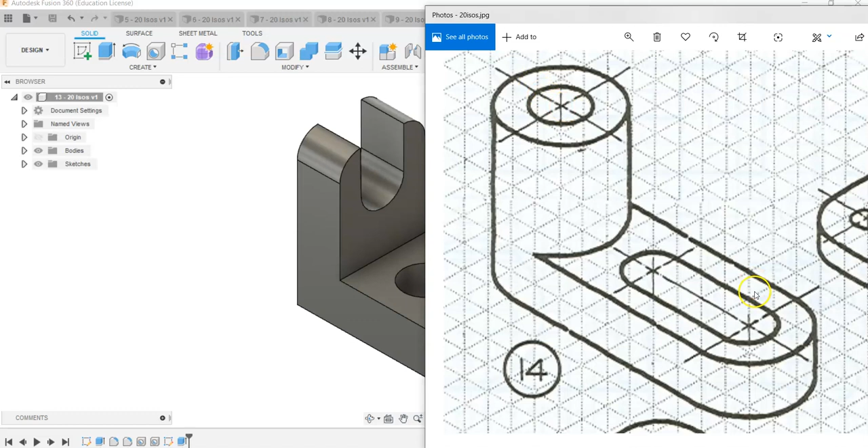So we have to find what the width of this object is first. The width of the object is 12. But we'll notice that we have a radius of 2 on each side. So if we have 2 here and 2 on the opposite side, I want to draw myself a line that's a distance of 8.

Let's go ahead and create a new design, click on our plane, and draw a line that's a distance of 8. This might make things a little easier to understand as we go, because the 8 dimension is what we'll call the spine of the object.

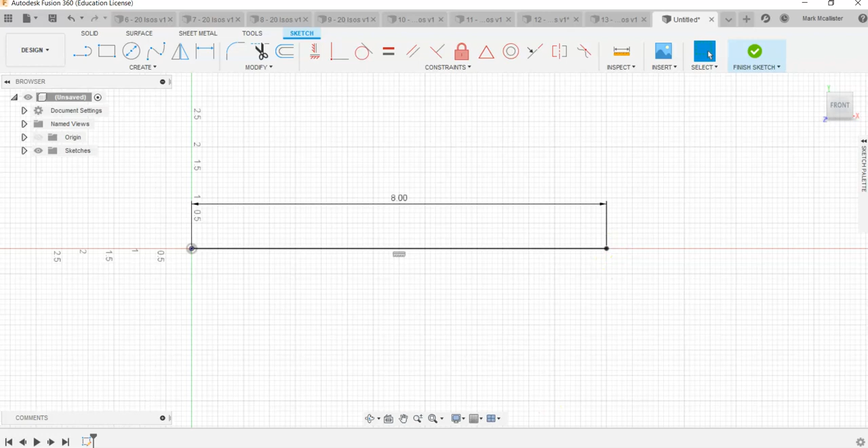It's the center point of our arc out here, and the center point of our circle here is this point. This can make things easier when we go in to draw our circles. Our circles have a diameter of 4, so I'm going to say 4 in this case and hit enter, because if we look back here, we have 1, 2, 3, 4. Same thing up here on the top.

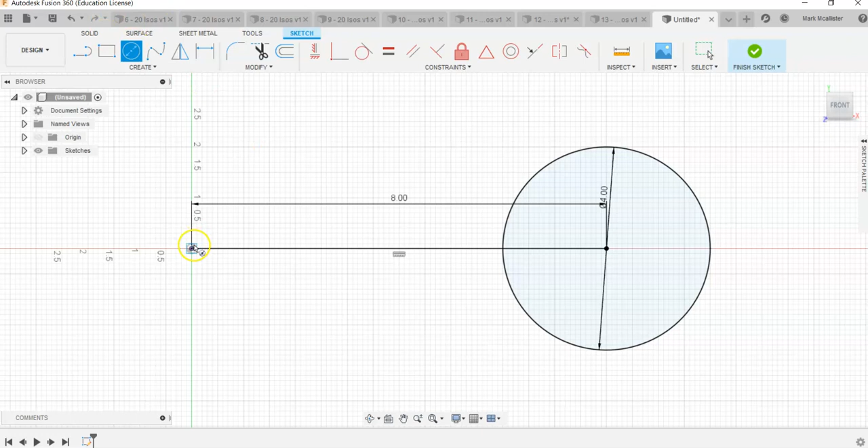We're going to go to the line circle command, put in a distance of 4, and hit enter. We're going to draw a line from up here at the top, and we want to make sure these lines are tangent. So when I click here, I'm going to drag over and click when it becomes tangent.

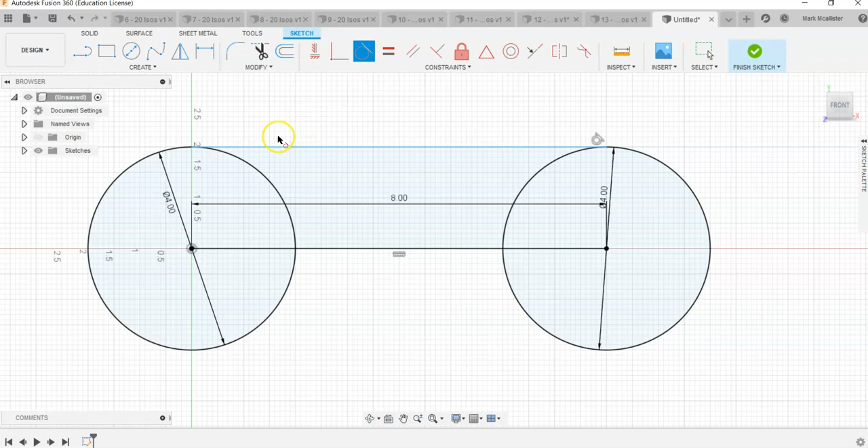We see that circle with the line on top of it, we're going to click. Now we want to make sure that the first line was tangent, so we're going to grab the tangent command, click here and click on our line, and make sure this dot comes up.

Now we want to mirror this to the opposite side, because this is a symmetrical shape. So I'm going to go to the mirror command, click on the top line, and it's going to ask for what mirror line we want. I'm going to click on our line here in the middle and say OK, and it flips to the opposite side.

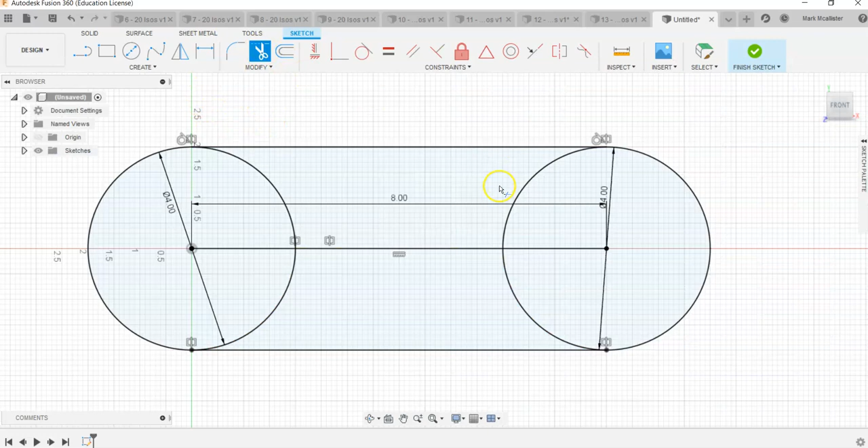Now we can trim out the objects in the middle, although we don't want to do that over here on this side. We only want to do it on the right side, because we want to be able to extrude that part up if possible. So we're going to trim out the arc on the opposite side. We'll go to trim, click on these two arcs on the inside, and we want that part out.

Now we're going to create the slot that we see over here on the side next. We want a center to center slot. So from here is 4, the distance from center to center, and 2 is the distance. We're going to go up to create, and we're going to choose slot, center to center slot, and click right here.

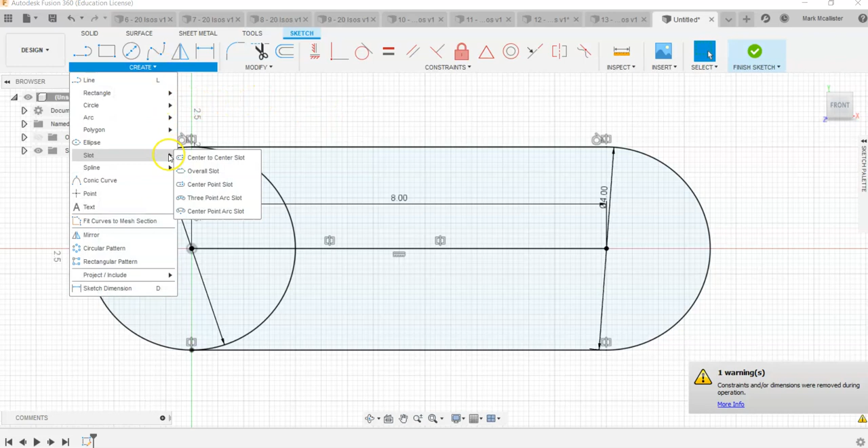We're going to drag to the left and put in 4, hit enter, then drag out, noticing our 2 arrows showing the distance. We'll put in a distance of 2 and hit enter, and we have that distance right there showing the side from one side of the slot to the other.

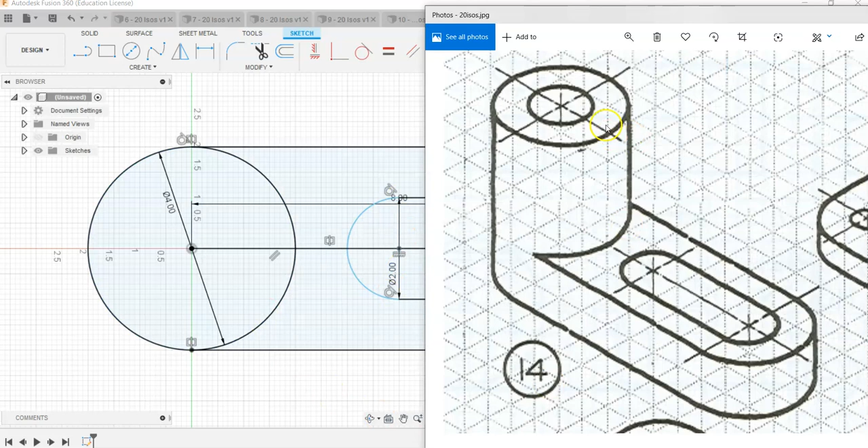We also want to draw for ourselves a circle that has a diameter of 2. Circle command here, diameter of 2, enter, finish sketch, go to extrude.

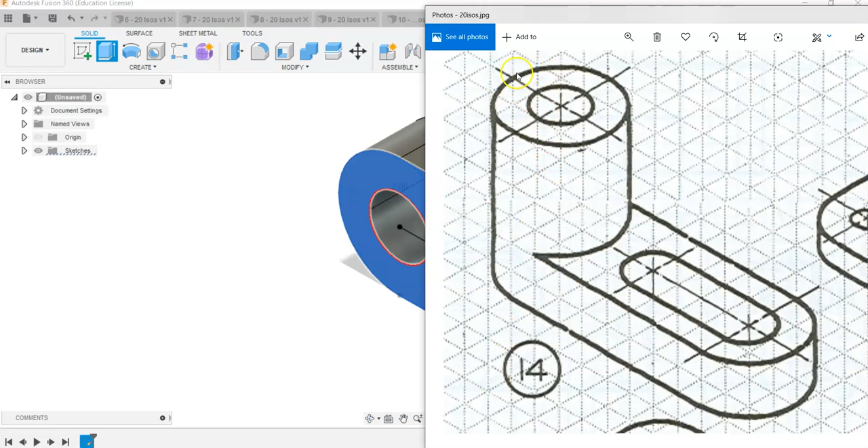We're going to go ahead and extrude only this part back. This should make things relatively simple for us, because then all we'd have to do is draw ourselves this circle and extrude it up. So all we need here is a depth of negative 2, and say OK.

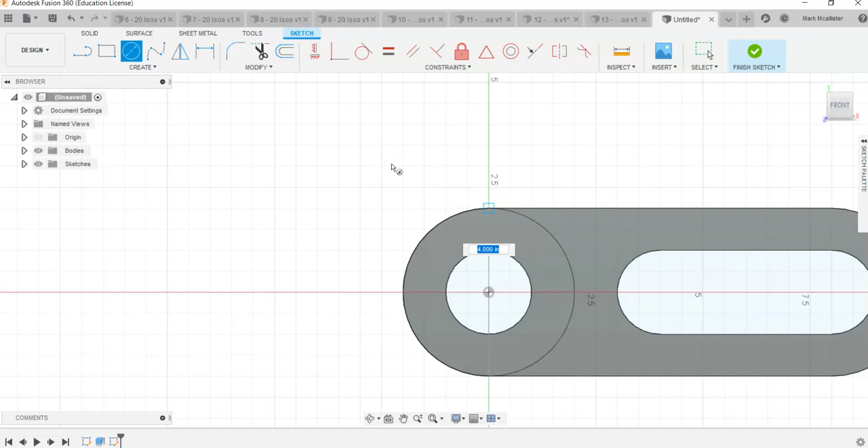So with this object, we already have our hole, and we have our slot drawn. If we grab Create Sketch and click on this surface here, drawing ourselves a circle from this center point out to the edge should be pretty easy. Just say Finish Sketch, come back around.

We'll take a look at our extrusion distance, which is going to be up a distance of 4. Extrude just this part, a distance of 4, enter, and we can go ahead and change up our view cube for purposes of later.

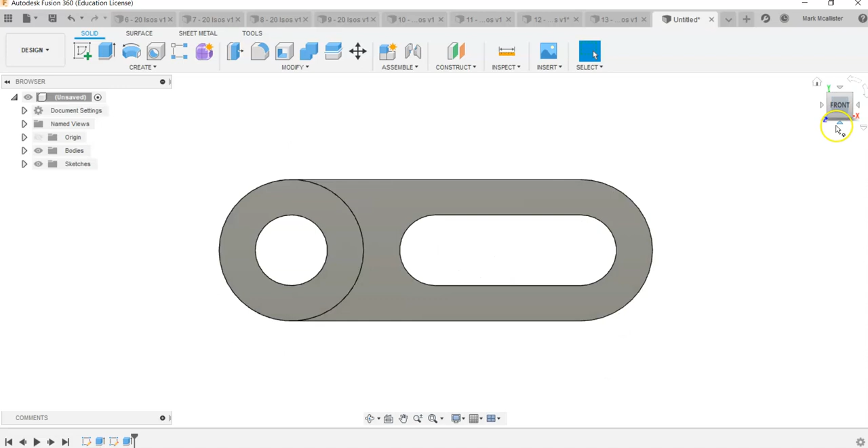So what we're going to do is move our view cube around until we have this corner. We can right click on that corner and go to Set Current View as Home, and go to Fit to View. Click on the word bottom, right click, and go to Set Current View As, and go to Front. Click on the house button, and we automatically now have an isometric view that looks exactly like the isometric view in our sketch.

Again, this is very important for when you go in and start placing views on a drawing sheet, which you will do towards the end of this project.

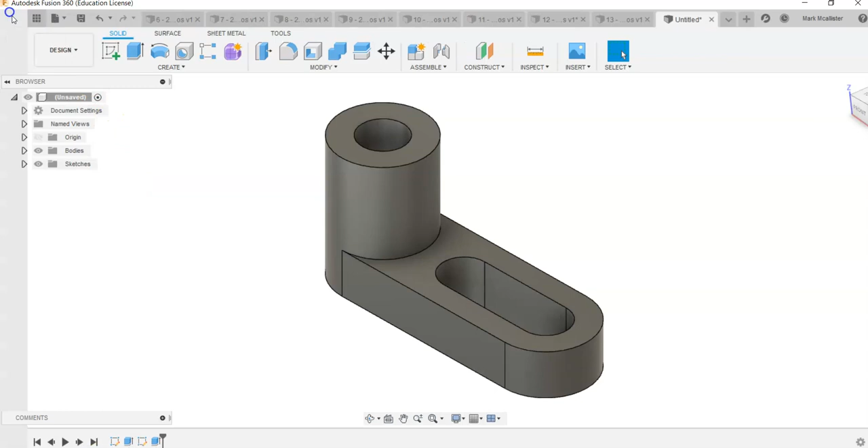So I want to reference again your folders that you have. If you've been following along and creating parts, you can actually see all of your parts over here on the left hand side in your folders. We can go ahead and get out of that and go back and see now that we have our part completed.

So this has been a video for how to go about creating number 14 in your 20 ISOs project in Fusion 360.